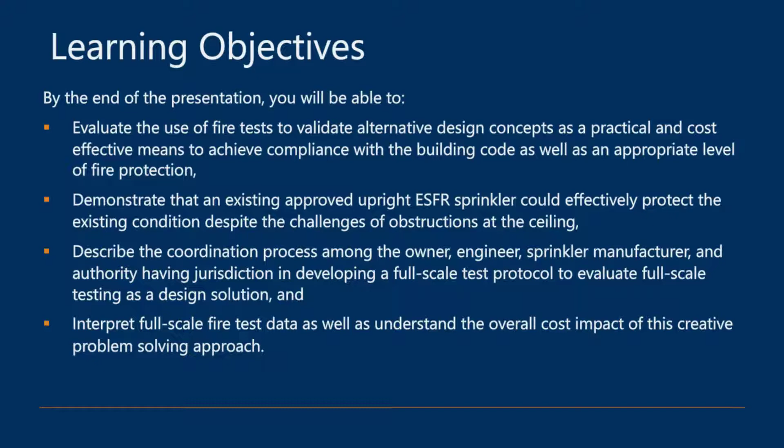We developed our proposed solution, which was obviously a fire test. We'll talk a little bit about that, and then we'll go through the results.

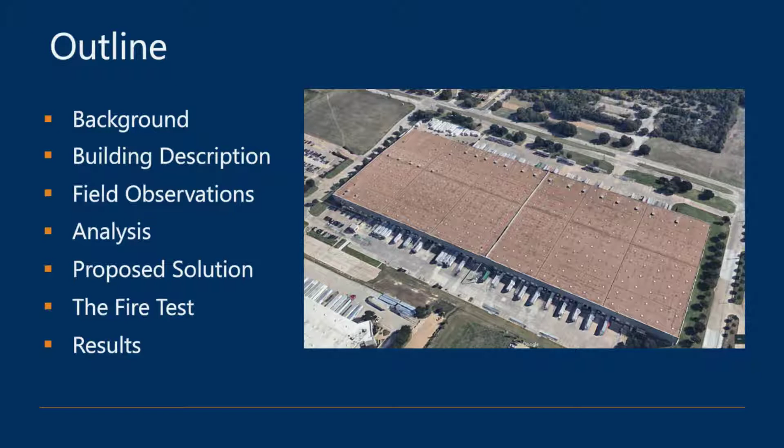Now, as engineers and architects, building professionals, we all consider ourselves creative and like to employ creative solutions whenever we can to solve the problems that we're faced with. And one of the great tools for being creative is making sure that you're asking yourself the right question. As we go through our lives as professionals and as people, we tend to get lulled into asking ourselves the obvious questions, the questions that appear right in front of our face.

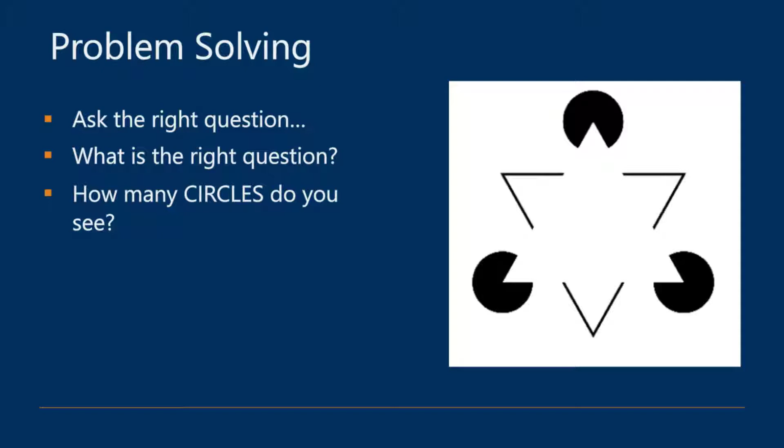Like as we look at this diagram, we might ask ourselves, how many circles do you see? Or how many triangles do you see? But in being creative, a lot of times it's about making sure that you're asking yourself the right question. I'll get back to that diagram and the analogy I'm trying to draw with that later on in the presentation, and hope you'll see where the tie-in is with that.

So a little bit of background on this project. This was an existing distribution center in Dallas, Texas. The building was on the market to get sold, and as part of that process, you're probably familiar with the due diligence surveys that a lot of prospective buyers will go through, and that's what happened in this project in particular. And in going through the process, a fire protection engineering firm involved in doing the survey identified a number of sprinkler-related issues with the building.

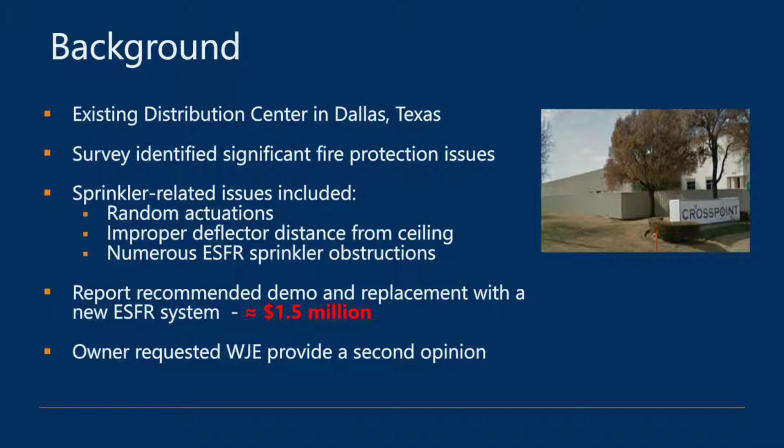ESFR sprinklers are very susceptible and very sensitive to obstructions. In this particular case, so many sprinklers were obstructed that the recommended fix was removal and replacement of the existing ESFR system with a new one, which was expensive. The estimated cost was about $1.5 million. It was a lot of money. The owner felt it was a lot of money, and as a result, they wanted a second opinion to see, first of all, is this a legitimate problem? And secondly, to evaluate whether or not there was a less expensive way to get an effective solution in place.

So that's where WJE got involved, and I got involved personally to help try to sort this out.

So a little bit about the building. The building had an average height of a little over 34 feet. It was 32 feet at the eaves, which sloped up to the peak at 36 feet 10 inches. The three center bays along the spine of the building all exceeded 35 feet in height, and that 35-foot height becomes critical as we try to solve the problem later on.

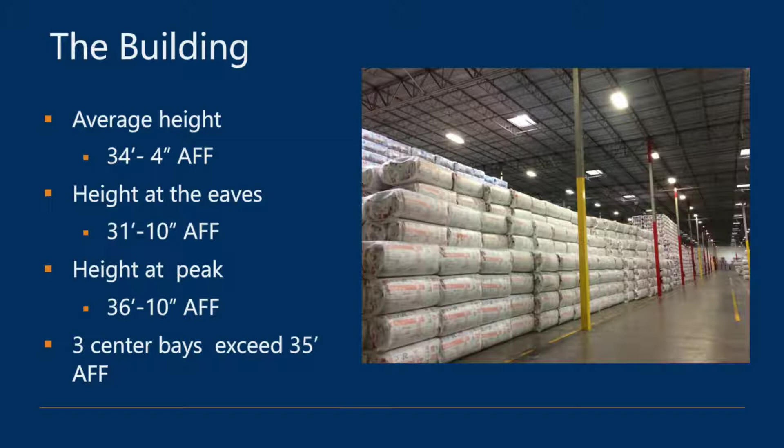You can see from the photograph the size of this warehouse, and you can also see the bottom chord of those trusses, which were the primary obstruction we were faced with regard to the sprinklers.

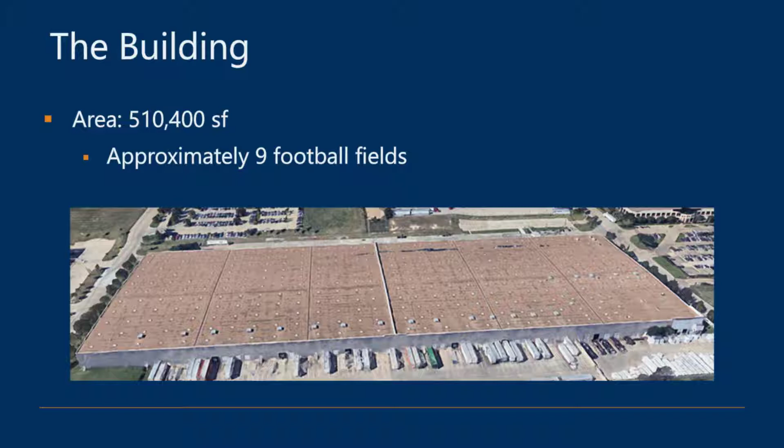The building had an area of about 500,000 square feet, which is a pretty big building. Just to put it in perspective, that's approximately 9 football fields. If football doesn't mean anything to you, that's about 255 Starbucks, so maybe that will help some of you.

The building was constructed in 1993, right around the time when ESFR sprinklers were starting to get a little bit more popular for use in warehouse situations. The building had an unprotected steel frame and a concrete floor slab, consistent with what the International Building Code would refer to as a Type 2B building.

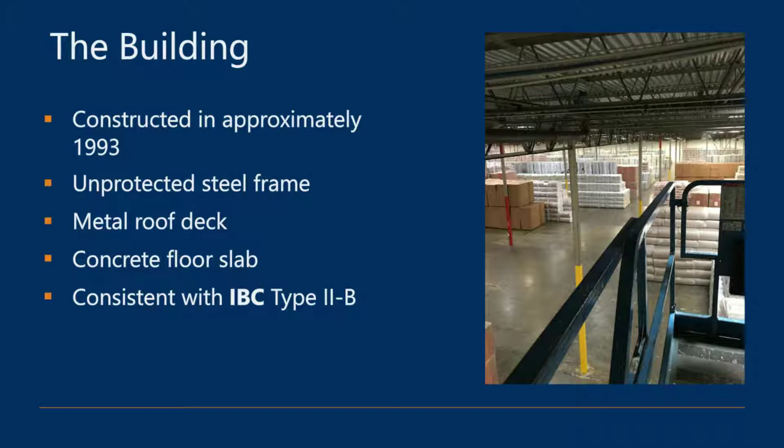For protection of storage areas, you care a lot about what you're storing, how high you're storing it, and how you're storing it. In this particular case, the building was housing Class 2 commodity bulk building insulation products. You can see them in the photographs here. Maximum height of about 24 feet, solid piled, encapsulated, high piled on wood pallets, in corrugated cartons. So not all that challenging to fire.

No idle pallet storage within the warehouse, so that was a good thing. But this warehouse was constructed for use by a variety of tenants. This particular tenant had about a 5-year lease at the time of the survey. I think they may have re-upped it, but the point is that the warehouse owner wanted to make sure the sprinkler protection was capable of serving a wide variety of tenant types with a wide variety of material storage, which is why ESFR sprinklers, early suppression fast response sprinklers, were so important to them for this building.

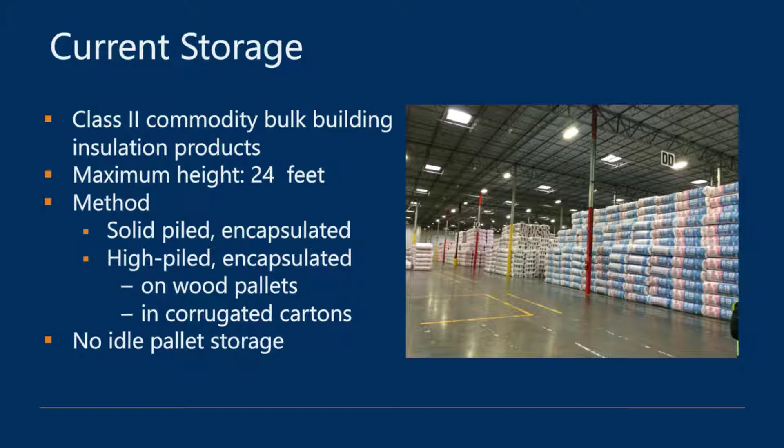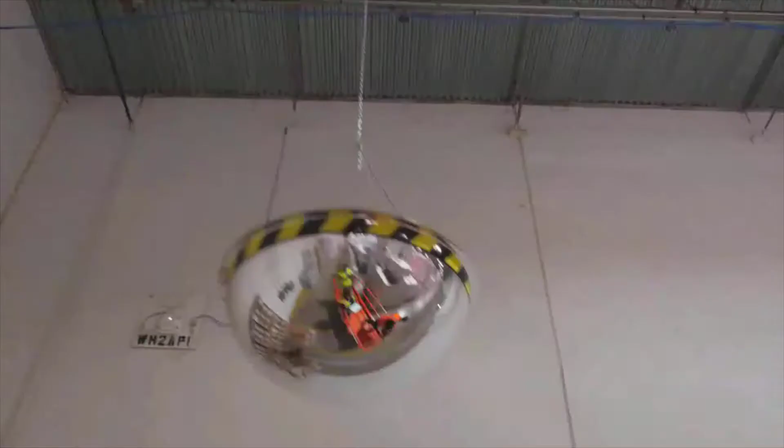So this is a quick video to give you a better idea of what the building actually feels like to be in. This video was taken after construction had implemented our solution. If you look quick, you can maybe see up there at the top the solution we implemented with the sprinklers. You also get a little bit of a better view of the truss system that acted as the predominant obstruction to the sprinklers that we saw in place.

This was actually filmed during our final CA visit to the site. You can see it's a very large building, and replacing the entire sprinkler system in a facility of this size would just be very expensive and disruptive as well. So that's certainly something the owner wanted to avoid if they could do it safely.

So let's talk a little bit about the sprinkler system that was in place. You can see a close-up photograph of the existing pendent ESFR that was in place at the facility—a K14 sprinkler ESFR, one of the first ESFRs on the market. The design basis for that system was 12 sprinklers operating at a pressure of 75 psi, which translates to about 121 gallons per minute coming out of the most remote sprinkler. The sprinklers were spaced 10 by 10 and were 165 degree Fahrenheit temperature sprinklers.

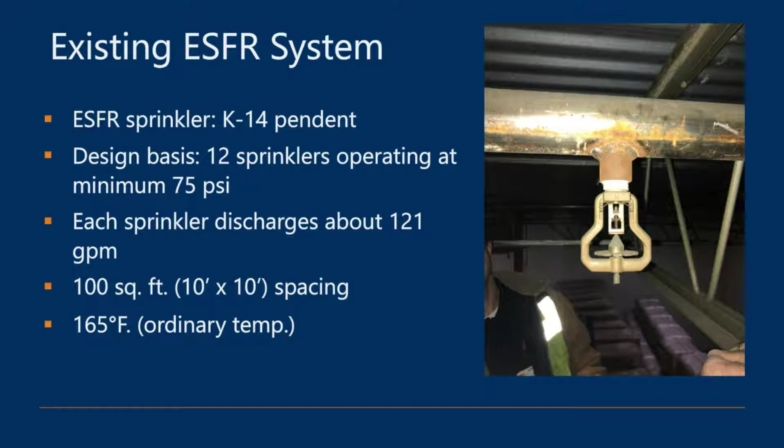Due to the size of the warehouse, the building was protected with 16 wet pipe ESFR sprinkler systems throughout, each monitored by a water flow switch.

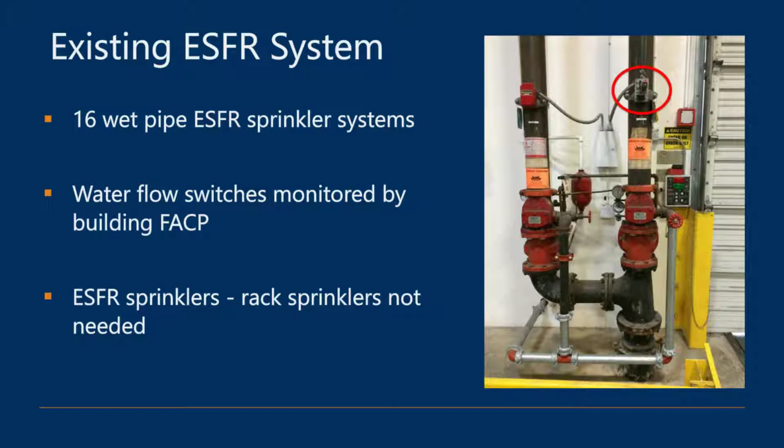As I said earlier, one of the benefits of ESFR sprinklers is that if you have those, then rack sprinklers are not required. So if the tenant that's coming in needs racks, you're not worried about having to install racks where you didn't have them, and vice versa. If you've had a client using rack storage and you're switching tenants to somebody using bulk storage, again, you don't have to pull those in-rack sprinklers out.

So what is an ESFR sprinkler? For those of you not familiar with early suppression fast response sprinklers, let me put it in a little bit of perspective, and I'll start at the bottom of this chart just to make it relatable.

If you're familiar with shower heads, hopefully most of you are, shower heads on average put out about 2 to 2.5 gallons per minute. So every morning you shower, you're getting hit with about 2 to 2.5 gallons a minute of water.

Whereas an ESFR sprinkler, you're dealing with about 60 times the amount of water flowing out, 121 gallons per minute. You'll also notice the pressure for ESFR sprinklers is considerably higher, hopefully higher than your shower head, but certainly higher than your standard sprinkler, with minimum operating pressures between 50 and 75 psi.

So it kind of makes sense if you think about what an ESFR sprinkler is designed for. ESFR sprinklers are designed for big fires, for warehouse and distribution center fires. So you've got a big fire, you need big water, so you need a lot of it - that's the gallons per minute. And you need high pressure too, because you're fighting the buoyancy of that larger fuel load.

That buoyancy effect would push the smaller water droplets up. But in order to get that water down to the seat of the fire, you want larger droplet sizes and more momentum, so therefore you need the higher pressure.

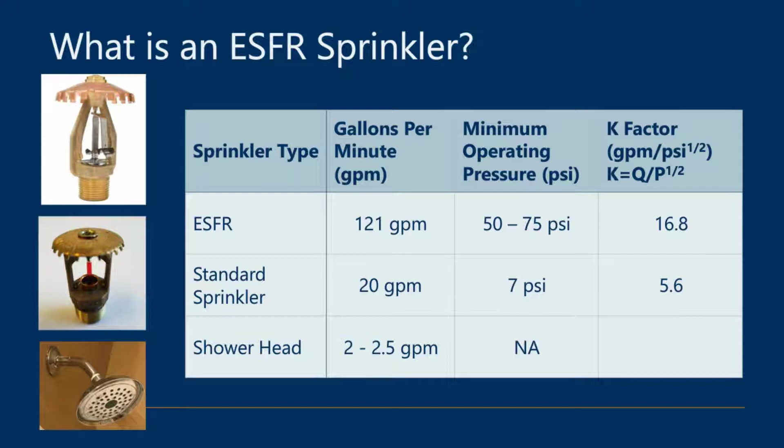So finally, we had the opportunity to get down to the site to take a look and see for ourselves what was going on with the sprinkler system, and evaluate whether the observations included in the initial due diligence report were accurate, and if they were, what we might be able to figure out to help resolve the problem.

So the first things we looked at were what we considered the easier problems, because they were easier to analyze and evaluate - the deflector distance between the ceiling and the sprinklers, as well as the actuation of the sprinklers. Right away we got in a lift and were able to see, yeah, the deflector distances exceeded what was permitted by both NFPA and FM, so that was going to be a problem.

With the spurious actuations, we had a good feel for the problem before we even went down. This building happened to be in Dallas, Texas, which can get pretty hot in the summer - it averages about 15 days per year over 100 degrees F. These sprinklers were installed in a warehouse 35 feet or so above the floor in an unconditioned warehouse in Dallas, Texas. So in the summer, those sprinklers over the years were exposed to very high ambient temperatures, and that's really what became the problem with the spurious actuations.

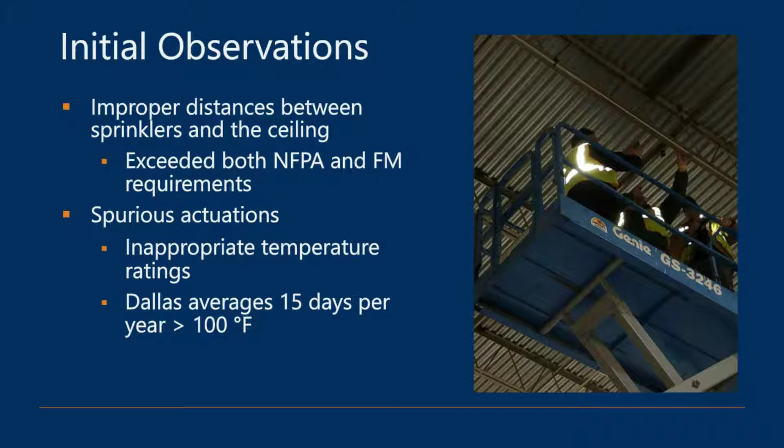So it's pretty easy to evaluate. But the most prominent problem as part of this was the obstructions. There were two types of obstructions we had to be aware of that were noted in the initial report. The first were fixed obstructions, primarily the bottom chord of the roof trusses.

NFPA 13, the National Fire Protection Association Standard 13 for the installation of sprinkler systems, requires that ESFR sprinklers be located at or below the obstructions, or at least 1 foot away horizontally.

FM Global, Factory Mutual standards, are similar - you can see the graphic to the right side. It's a little bit more of a graduated curve on the FM Global side, but obviously the closer you get to that sprinkler, the more likely you are to obstruct that ESFR flow pattern. So you've got to be aware of what's going on in terms of your obstructions relative to your ESFR sprinkler.

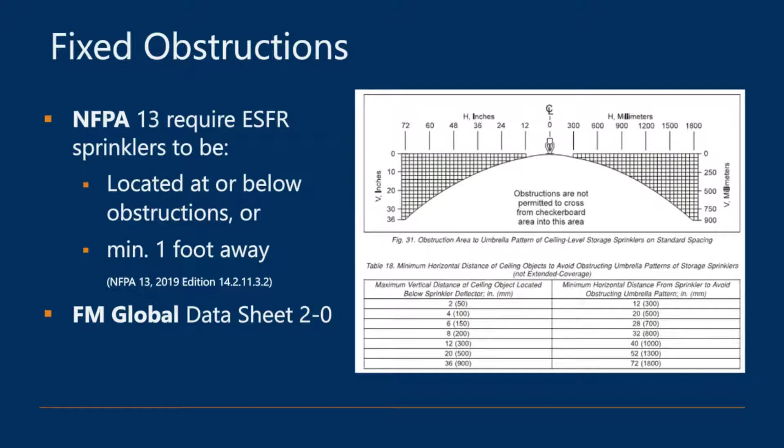In getting out to the field, we did confirm that there were plenty of structural obstructions to the ESFR sprinklers. The truss chords were, first of all, 22 inches deep, so they were already going to be below the sprinkler location. From our accounting, we noticed at least 1,800 sprinklers that were obstructed by the bottom truss chords. So that was not good news - not unexpected, but not good news.

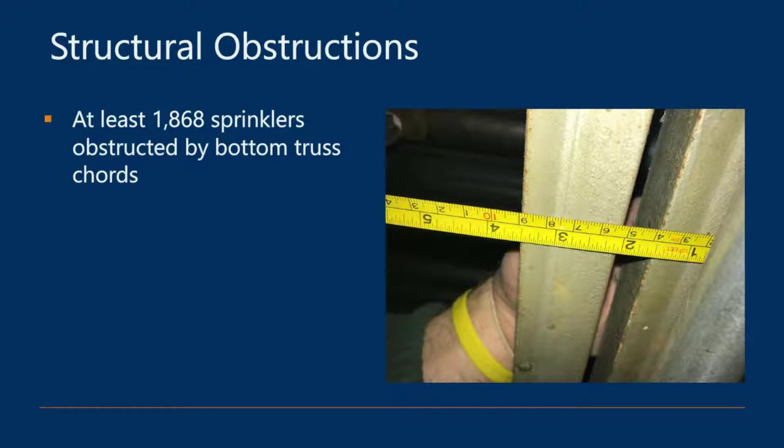Additional obstructions that were noted and that we confirmed were in place at the warehouse were light fixtures, unit heaters, and conduit installed at ceiling level that were obstructing individual ESFR sprinklers. We observed and estimated about 500 of those.

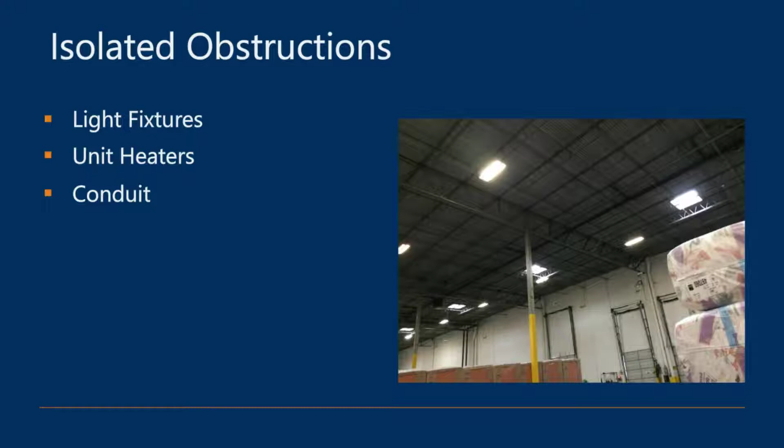Then we had more bad news for the owner when we observed that the proposed solution, to demo and reinstall the ESFR system with a new one at $1.5 million, wouldn't work. The reason was the roof trusses were spaced 5 foot 6 inches on center. With ESFR sprinkler spacing being a maximum of 10 feet and a minimum of 8 feet on center, that 5 foot 6 spacing of the roof trusses was a problem because there was no regular geometric spacing we could come up with that matched the truss spacing. No matter what we did, we'd run into sprinklers being obstructed by the roof trusses.

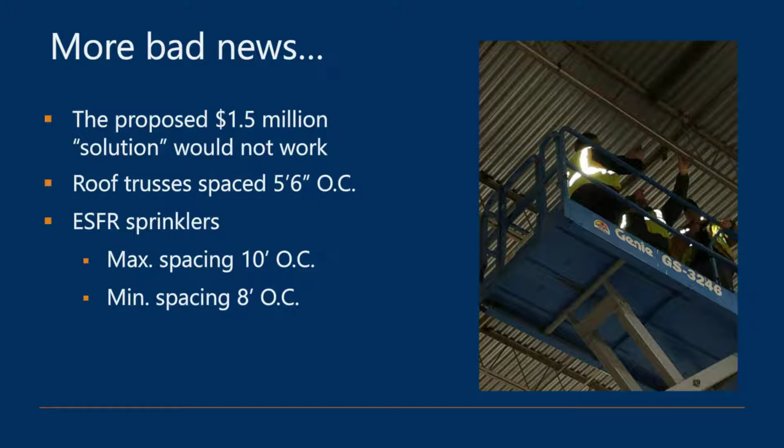That had us scratching our heads because we were really hoping to come up with a nice, elegant solution for our client. At that time in the field, it wasn't looking good.

So just to go back to where we started: the initial report indicated the building had an ESFR system with a solution of about $1.5 million, which was too much for the owner to bear. And as I said, that ESFR sprinkler solution suggested in the initial report wouldn't work, so that's no longer an option on the table. We had to come up with alternate options.

The first option we came up with, we weren't all that pleased with. It was a non-ESFR sprinkler solution using large orifice storage sprinklers capable of protecting class 1 through 4 and group A plastic commodities, but it wasn't an ESFR solution. So there was limited flexibility in the types and arrangements of storage that would be permitted with that option, and that's not something the owner really wanted to implement.

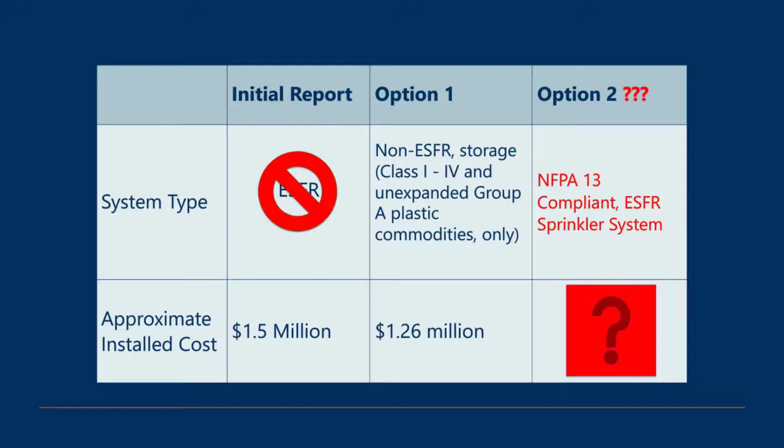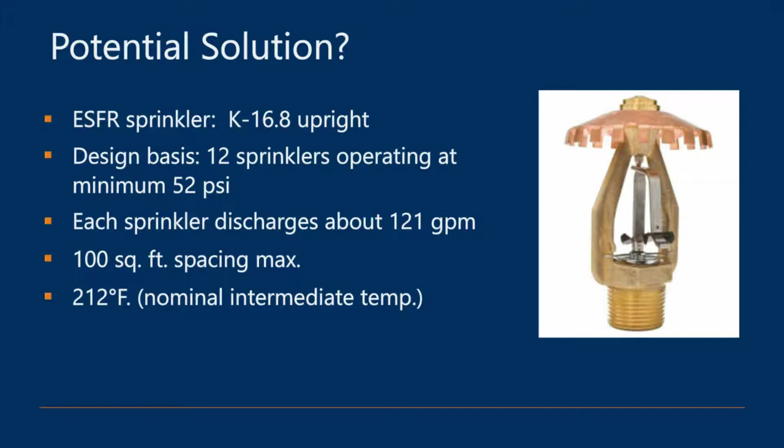So we were aware that there were upright ESFR sprinklers on the market, and we looked at those as a potential solution. The design basis was similar to the pendant ESFRs currently in place. In fact, the 121 gallons per minute was exactly the same as the existing pendants. There was also 100 square foot spacing, so we could reuse the existing spacing. They also had a 212 degree Fahrenheit option, so we could increase the temperature rating of those heads and eliminate the spurious actuations.

Another major pro, and one reason we were looking at upright ESFRs, is that it would eliminate the issue of the bottom truss chord obstruction. As long as the truss chord is less than 4 inches, according to NFPA 13, we don't have to worry about the bottom truss chord as an obstruction. In our case, the bottom of those truss chords were 3.5 inches wide. So if we could find an upright ESFR that was listed, then we were golden.

All we would need to do is disconnect the mechanical tee, rotate those branch line pipes 180 degrees so the opening was on top, adjust the riser nipples to get the deflector distance we needed between the sprinkler and the ceiling, install the 212s, and we'd be all set, right?

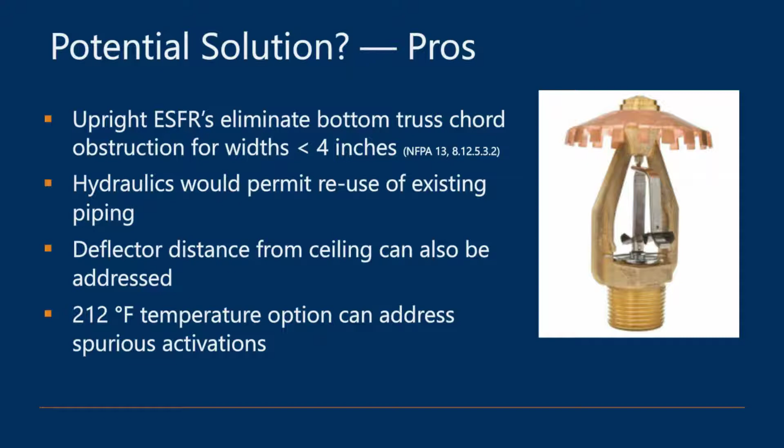But there were cons too, and the cons were what really stumped us. If you remember when I talked about the building height, the center bays were all at heights greater than 35 feet. And the particular upright ESFR sprinkler we were looking at was not currently listed or approved for building heights greater than 35 feet.

So we had a potential solution. We were close, but we were 1 foot 10 inches away in terms of the sprinkler's listing from being able to use this sprinkler as a solution. That was a real head scratcher and a real problem, and it was pretty frustrating as well. So that eliminated the sprinkler as a solution.

As we were faced with that, we stared at that language for a long time, not listed or approved. Finally it drove us to ask, do we have an engineering problem here, or do we have a code problem? If it's not listed or approved, does that matter, as long as it's effective? Maybe we're not asking the right question.

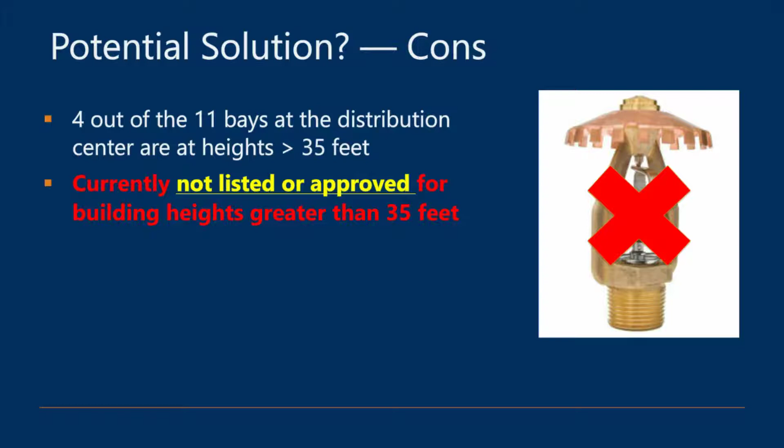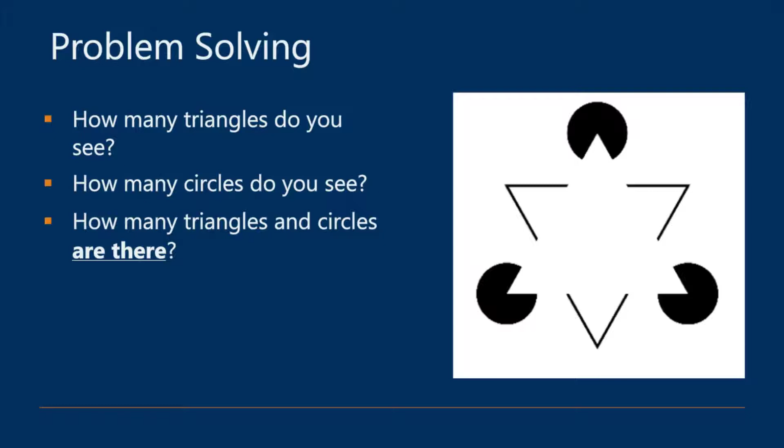That's the analogy I'm trying to tie in, because as we were looking at this sprinkler as a possible solution, one of the questions we asked ourselves was, is there a sprinkler listed for heights greater than 35 feet, an upright ESFR sprinkler? But that's really not the question that was going to help us solve the problem. The question that was going to help us solve the problem is: is the sprinkler effective at a height of 36 feet 10 inches? That's the question we needed answers to. Once we started asking ourselves the right question, that opened up an avenue for us to investigate and see if we had a solution or not.

The solution we were looking at was, obviously, full-scale fire testing.

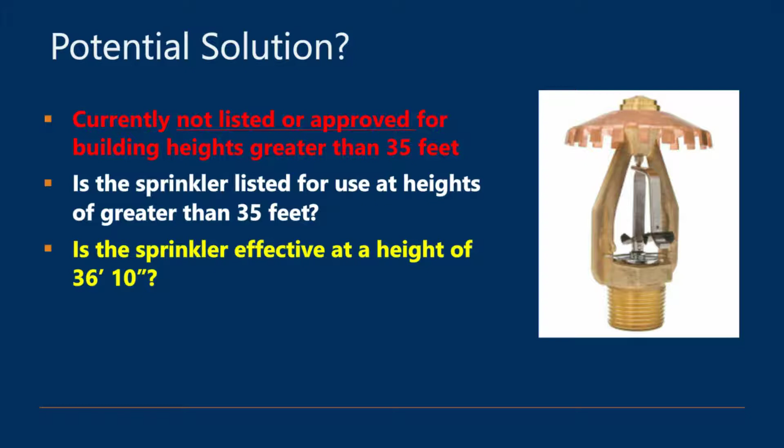The first thing we had to do was speak with the owner about the concept and see if that was something they were willing to entertain. They had a choice of a by-the-book solution approved by NFPA 13, which they knew with certainty they'd be able to implement — the non-ESFR warehouse storage protection approach. It wasn't necessarily the solution they were looking for, but it would allow them to put the question and the problem behind them.

We weren't really sure how they were going to react to what amounted to rolling the dice a little bit. We felt pretty good about possibly getting a good solution out of this, but we weren't sure how they'd feel about it. Eventually they gave us the go-ahead to investigate it.

So we started doing some research, and we ended up with two candidate sprinklers. The one we selected was the Tyco K17 ESFR upright sprinkler. Factory Mutual, FM, and Tyco the manufacturer were kind enough to give us permission to access that initial fire test research. Back when it was originally approved, in the early 90s, FM required 4 separate sprinkler tests for each ESFR sprinkler in order to get FM approval.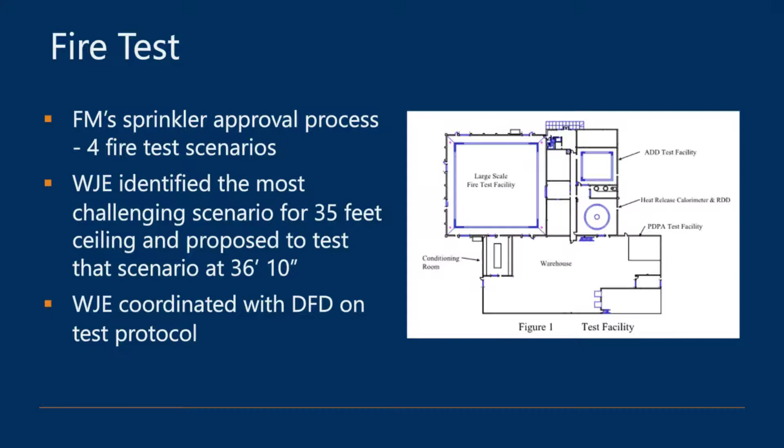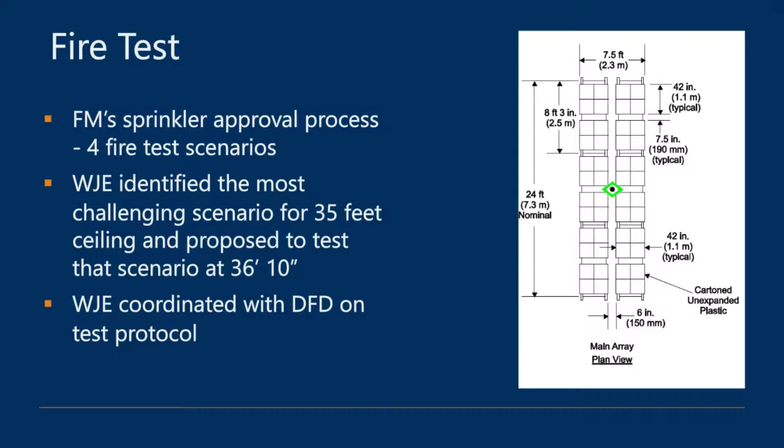In terms of the test we used, this actually lays out the most challenging fire scenario, which is the ESFR sprinkler centered with the fire being initiated directly between two sprinklers.

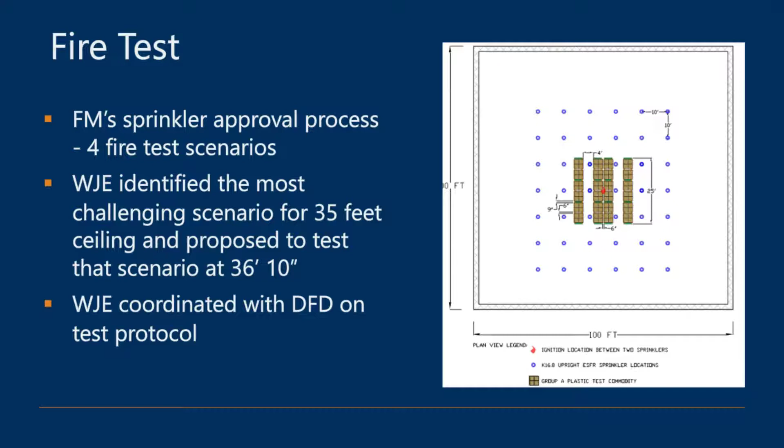This slide shows a couple of elevation views again of the test facility. It's worth pointing out that the UL test facility has an adjustable height ceiling, so you can customize the height you're testing to with a great amount of flexibility. UL was able to get the 36-foot 10-inch ceiling height that we needed for our test.

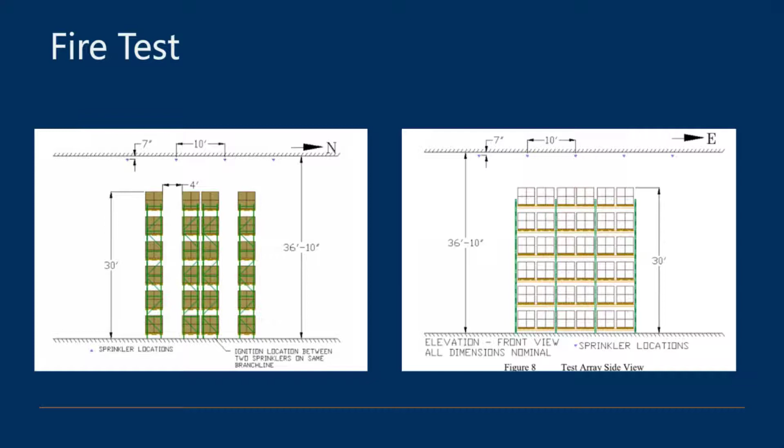You can see the nominal 30-foot high storage, and everything else with regard to the FM approval test that was originally done as part of the approval process for FM. UL was able to help us customize and line that up. There were a few things in that original test that we changed, and you can see those labeled here.

The most obvious one is the nominal ceiling height. Obviously we didn't need this to work at 40 feet. This sprinkler was listed at 35 feet, and typically ESFR sprinklers are tested at increments of 5 feet, but we didn't need it to work at 40 feet - we needed it to work at 36 feet 10 inches. So that was the first thing we adjusted.

The nominal sprinkler pressure is also something we adjusted. When the original sprinkler was tested, it was tested at a nominal pressure of 50 psi. However, since that time, NFPA 13 had changed to require a minimum 52 psi at the end head for sprinklers of this type, so we thought it would make sense to comply with NFPA 13 requirements in that regard. We tested it at 52 psi, and we knew our water supply could provide that, so that wasn't a problem. Then the third thing that we changed, which was not significant but worth mentioning, is the branch line pipe diameter.

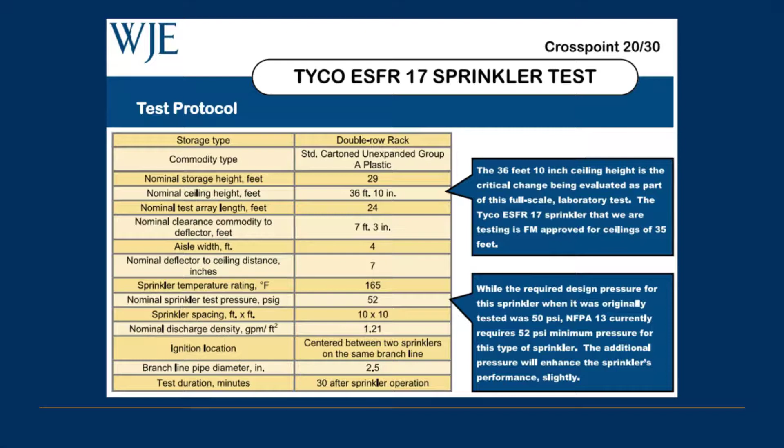Now, when you run a test like this, there are 5 pass-fail criteria that are critical for ESFR sprinklers in order to pass a full-scale fire test, and you can see them laid out here.

The top 2 have to do with temperature at the ceiling, which are measured by thermocouples and some target steel up at the top of the test arrangement. The maximum peak ceiling steel temperature you can see during the test is 1,200 degrees Fahrenheit, with a maximum average ceiling steel temperature of 1,000 degrees Fahrenheit, averaged over 5 thermocouples on the target steel.

Then finally, some of the other parameters are aisle jump. The arrangement is set up with 4-foot aisles, so you've got your fire array, and then you've got target arrays on either side. If the fire jumps the aisle on either side at all, that's a fail. Also, fire spread to the end of the test array or any of the other arrays is not permitted, so that would also be a fail.

And then finally, probably the issue we were concerned with most was the maximum number of sprinklers allowed to operate. During the test, if more than 8 sprinklers operate during the test duration, which is 30 minutes start to finish, that test is a fail.

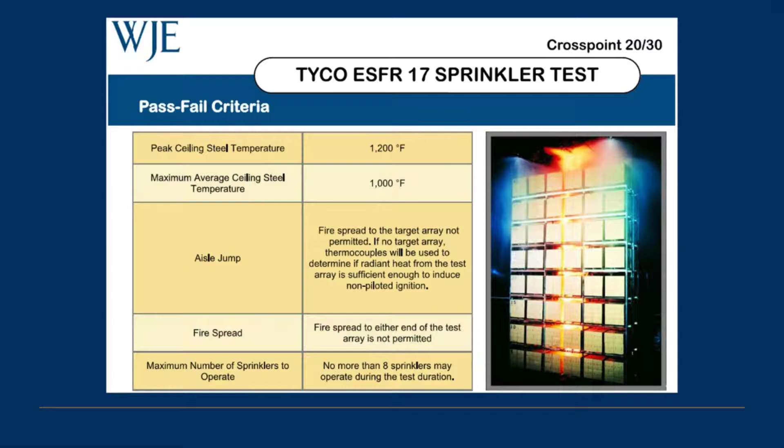Here's an image of the test array before we actually ignited, and you can see the fire array in the center, the target arrays on the left and right side with the 4-foot aisle in between. If you look at the top of the image, you should be able to see the ESFR upright sprinklers on a 10 by 10 grid.

In the vicinity of each sprinkler, UL also has thermocouples mounted so they can measure the temperature and gauge what's happening temperature-wise up at the ceiling level for the purposes of analyzing the test after the fact.

Here's a couple more images of the test array before the fire. One is a close-up, giving a good idea of what 30-foot high storage looks like when you're standing next to it. Again, you can see the ESFR sprinkler grid at the ceiling on top.

The other image shows the igniters used when the fire test is kicked off. You can see a couple of the white ceramic bricks, and on top of those bricks are 4 igniters, which are essentially gauze and paper towel soaked in kerosene in a plastic bag. You'll see in the test video that the flames initiate rather quickly, so it doesn't really add any fuel load to the fire—it's just there to make sure that when you ignite it, you get sustained burning.

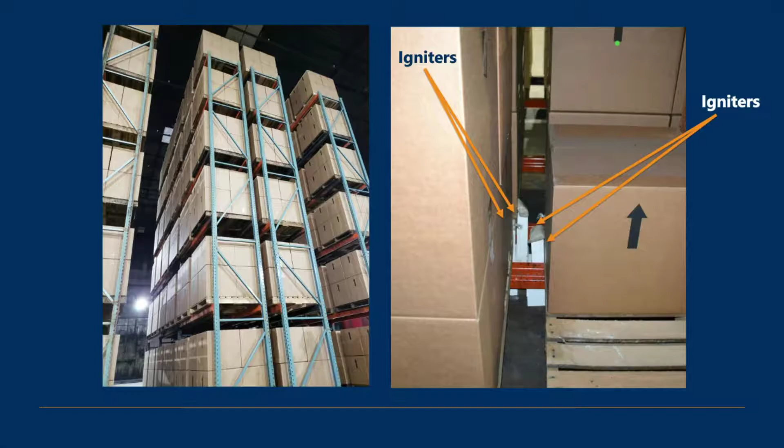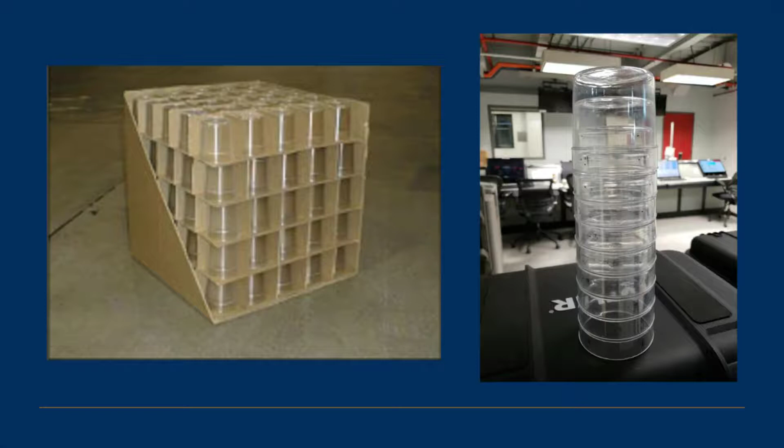In case you were curious what the fuel is inside those cardboard cartons, it's a 5x5 array of a Group A plastic commodity. You can see it there. Again, photos courtesy of UL.

Now here's a video clip of what we actually saw, and you want to keep an eye at the top. The sprinklers actuate relatively quickly, I think within the first 40 seconds or so.

Having not conducted a full-scale fire test before this, it was pretty exciting. I was pretty anxious to actually witness it until I got to the lab and was standing next to the client who had about $1 million riding on this.

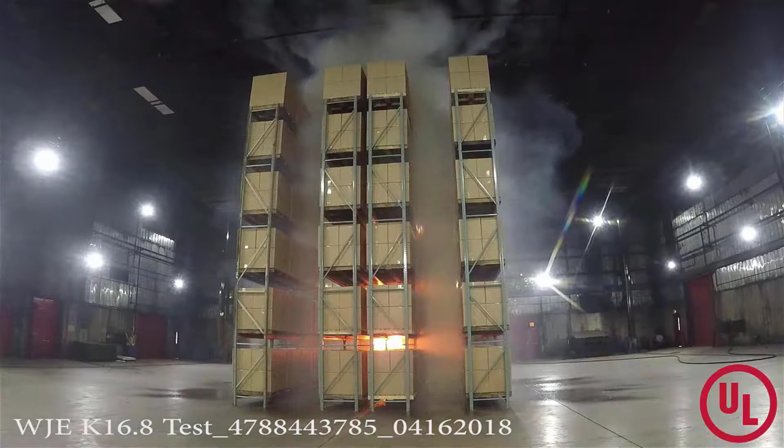It gets a little tense when you see that fire grow so quickly, but you see those two sprinklers actuate really fast. At that point we're wondering—those first two went quick, I hope we don't have more than 6 behind them.

But the sprinkler performed very, very well, much better than I expected. Those two sprinklers that operated right at the beginning are actually the only two sprinklers that operated throughout the duration of the test.

You can see that they knocked it down pretty quickly, and we're already starting to get that lighter smoke that's indicative of control of the fire. We'll just let this go a little bit longer, and you can see that ultimately we're going to get full suppression with just those two sprinklers.

I'm going to show you some after photos once we're done with the video here. But the entire array of boxes stays in place throughout the fire, so eventually those sprinklers extinguish the fire on their own, and those boxes stay in place. We're very happy with the performance of the sprinkler in this case.

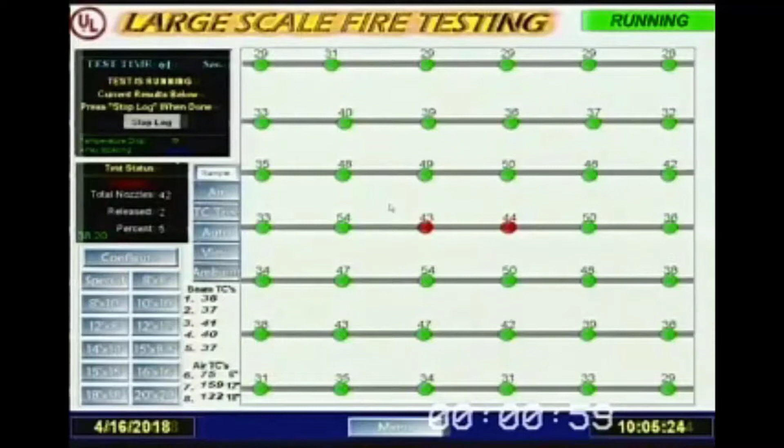This is just another good view to give you an idea of what goes on at ceiling level during a test like this. You'll see temperatures rise, the two sprinklers operate, and you can see the temperatures of the sprinklers on the perimeter drop dramatically right after sprinkler actuation, which is what you'd expect to happen. I think this is a good illustration of what's actually happening from a temperature standpoint at ceiling level.

So there's that after photo that I promised you. You can see, with the exception of some of the boxes that were pulled out as part of the overhaul procedure at the test facility, that the commodity actually almost looks as it did before the fire test.

It's a little closer-up view in the vicinity directly associated with the fire, and it's just one more angle of that same test array.

So I ran through it a little bit already verbally, but we'll go through it again. The test results: only 2 sprinklers actuated when 8 sprinklers were permitted, so that's a good result.

Clearly no fire spread to the end of the array, and no fire jump across the aisle. So again, those are all passing criteria.

In addition to the thermocouples at the sprinklers, thermocouples were mounted on a piece of target steel up at that movable ceiling within the lab. During our test, we maintained an average steel temperature of 110 degrees Fahrenheit throughout the test, where 1,000 degrees is permitted. So we weren't even close to reaching that fail point for steel temperature.

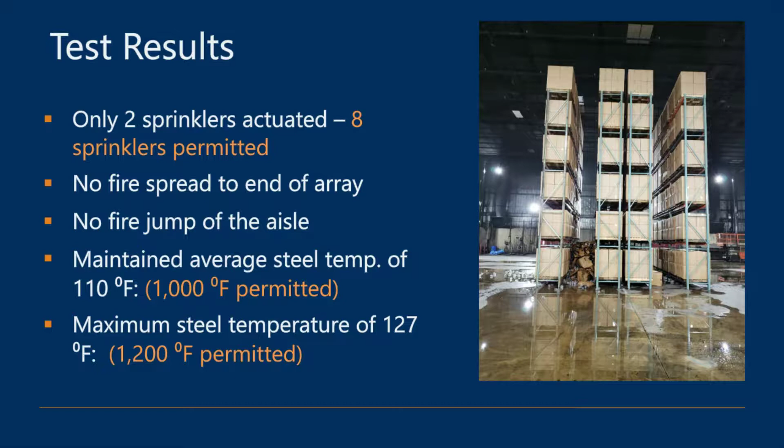Ultimately, we were able to share these results with the city of Dallas. Now, when we met with the city of Dallas, it was a crucial aspect of the project. I touched on it earlier, but barely.

We obviously wanted to make sure that the local authority having jurisdiction was going to accept the results of this test before we made this investment for the client. So we had that conversation with them. They provided us some good input, and we tweaked what we decided to do a little bit based on their input, but it wasn't all that much in terms of changes.

We communicated the results of the test with them, and of course we were kind of waiting with bated breath for the thumbs up from them, which we eventually did get, so that was great. Ultimately, we were retained to help implement the solution.

which incorporated some high volume, low speed fans, HVLS, that's what that stands for, up at the ceiling level to help provide some conditioning in that warehouse space.

So with the ESFR sprinklers in place, based on this approach, the value of the asset was maintained, and we also happened to realize a construction savings for the owner of more than $1 million.

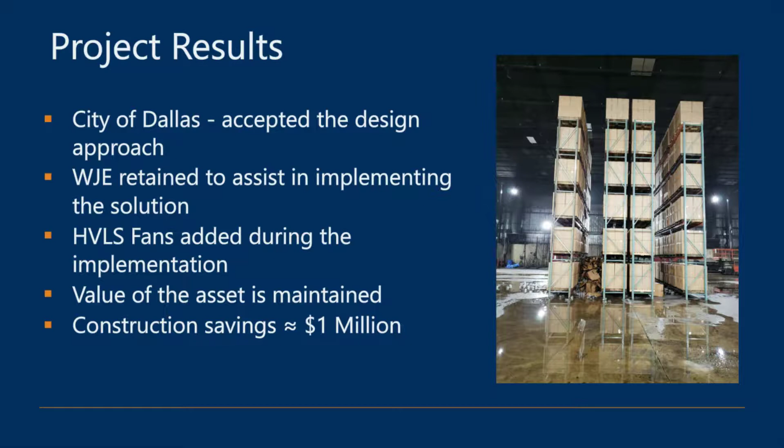To go back and take a look at where we started, again, we had a potential ESFR solution that was proposed that wasn't really an ESFR solution that could be implemented.

Our option number one was the non-ESFR storage sprinkler solution at 1.6 million or 1.26 million, and then finally, with implementing this more creative solution of doing full-scale testing of an existing ESFR upright sprinkler, the net cost was a little bit less than $500,000.

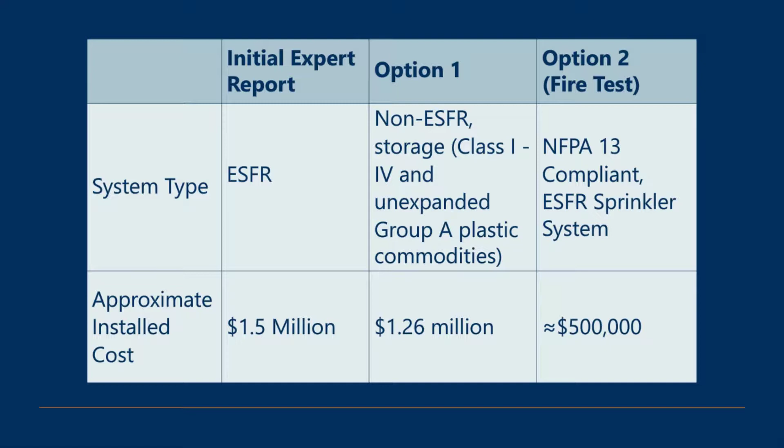So some of the project takeaways for me, for starters—and I think a lot of this we all know—don't assume that previously suggested solutions are going to get you the answer that you need. You always got to vet them out, and I think we all do that as building professionals anyway. But it's something that's important to remember.

Also, when you're looking for creative solutions, which we do all the time, one of the first things you need to do is make sure you're asking yourself the right question, and that can make all the difference in what you see as a real limitation versus a perceived limitation. If you start asking yourself the right questions, a lot of those roadblocks that might be blocking you from getting where you need to go might disappear.

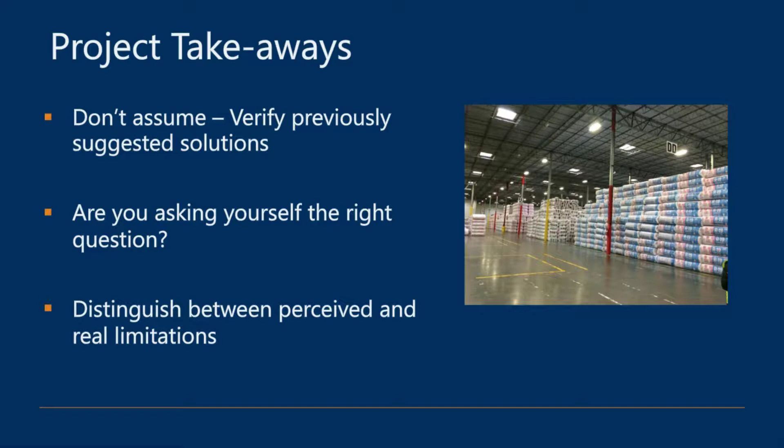Now, finally, before I finish up, something else that's important to note. Shortly after we did this test, there was a final round of testing done by the Fire Protection Research Foundation as part of an ongoing series of tests that had been going on since about 2014, if I have that right.

Garner Palenske, who happens to be a WJE engineer as well, has been running that research project for the Fire Protection Research Foundation.

As part of that testing series, 100 ADD tests—actual delivered density tests—were done, and you can see the images of those on the right, to gauge the performance of pendant ESFR sprinklers subject to obstructions consistent with, and then more challenging than, what is permitted by NFPA, because there was some research that wanted to look into those obstructions to see if the NFPA obstruction criteria for pendant ESFRs was overly conservative.

So as part of that test, 100 ADD tests were performed, and finally 9 full-scale tests that were vetted based on the performance of ESFR pendant sprinklers during the ADD tests. And those tests actually confirmed that NFPA installation criteria for pendant ESFR sprinklers was a little bit more conservative than it had to be.